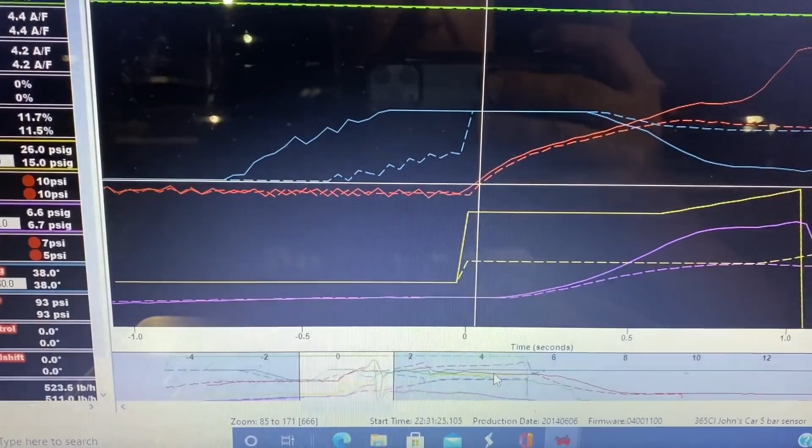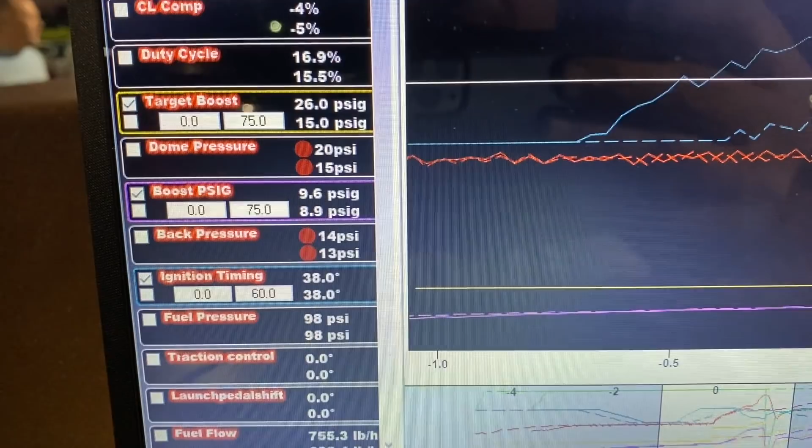You can see it got up on the wheel pretty hard and spun. So if you look at the data log, the first thing is I'm an idiot, and this has happened to me twice now. The solid line there is the run I just did. So look, it lets go of trans brake, and boom, I did have a little bit more on it there, but I did not have that much on it. It went to 26 pounds of boost. The top number is the actual boost as it's making it. It hooked it initially, but look at the boost curve here.

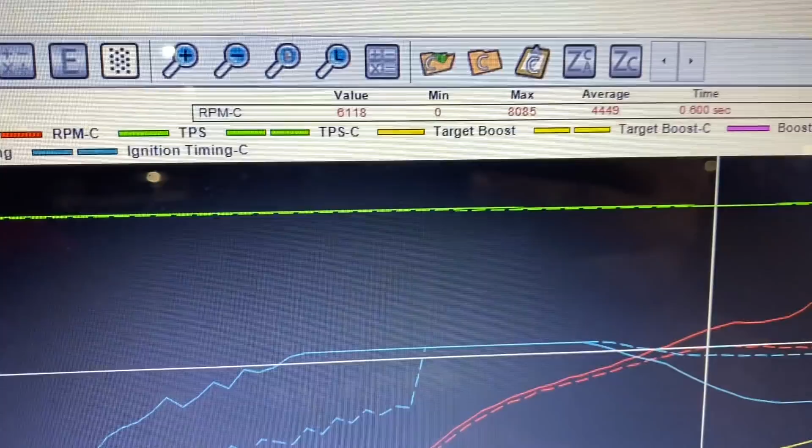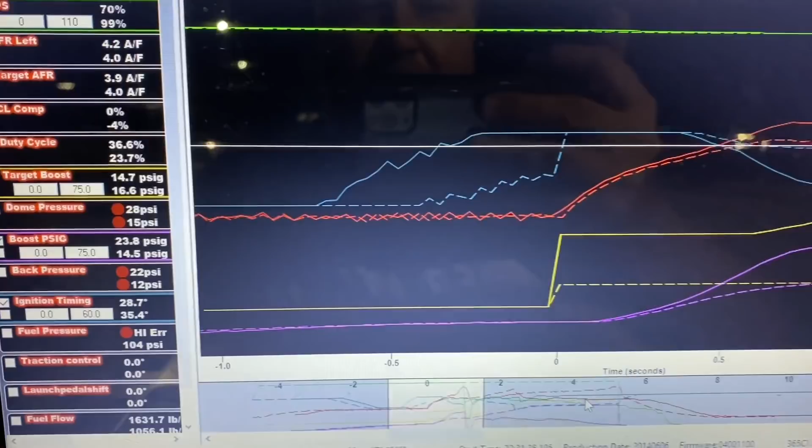So we're at 0.6 seconds into the run, that's at 19 pounds of boost, and you see it's just climbing. It made 25 pounds of boost before I let off. But also, if you look, I was like, well, that's not what was supposed to be. I bet if you go back and look in the video, look at that. I'm a freaking idiot.

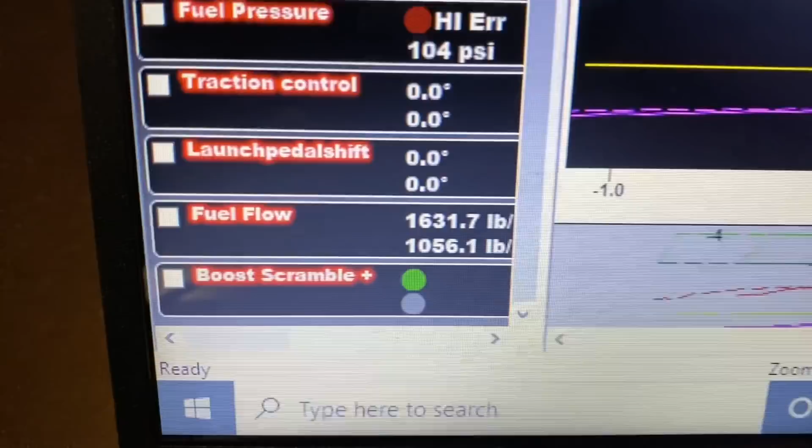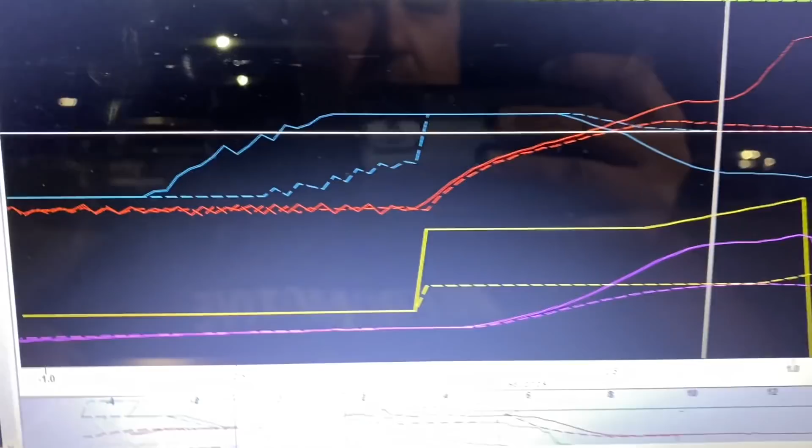It had 8 pounds on it on the scramble, and so when I let go of trans brake, it put 8 on top of what I was trying to make. So we're gonna have to go back up there again and try to make this pass again, because that's clearly not going to work. But that right there should be 8 pounds less dome pressure right there. So 8 pounds less, that should be about 16, 17 pounds of boost right there, and that's where I wanted it instead of 22. I don't know if it's going to take it or not, though, but we're going to try it. That's why it knocked tire off, because I'm an idiot and I had the scramble button pressed.

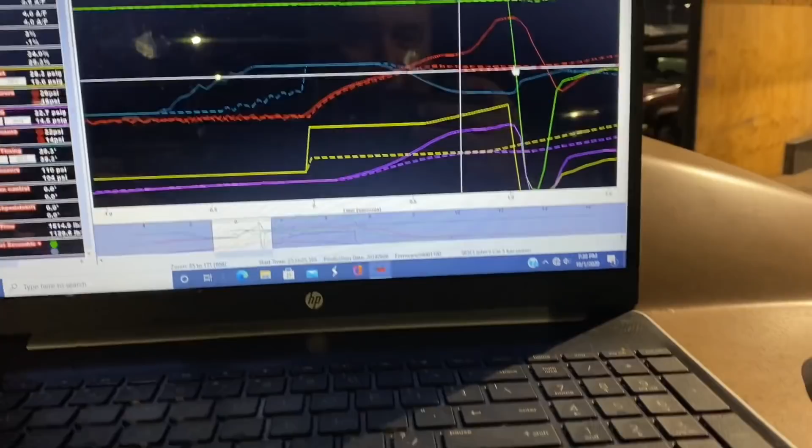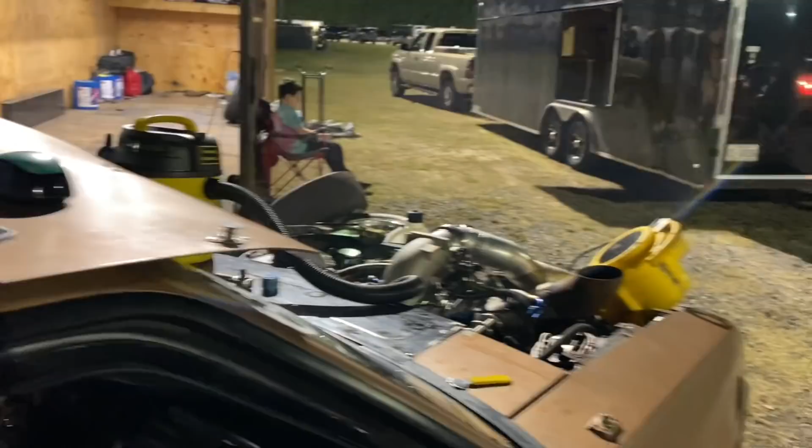Probably what I need to do is hook that scramble button up to a light somehow, so that when it's pressed on, a light comes on, you know what I mean, and that way I've got some type of notice. Or just don't be a fool and pull it back every time, make sure it's off.

Out here at Galot. David, he's got this - this is the car we shared a little bit of when I run last week. He's got the big block with a 118, and Cleve is here with his as well. He's been jumping on our live feeds with us.

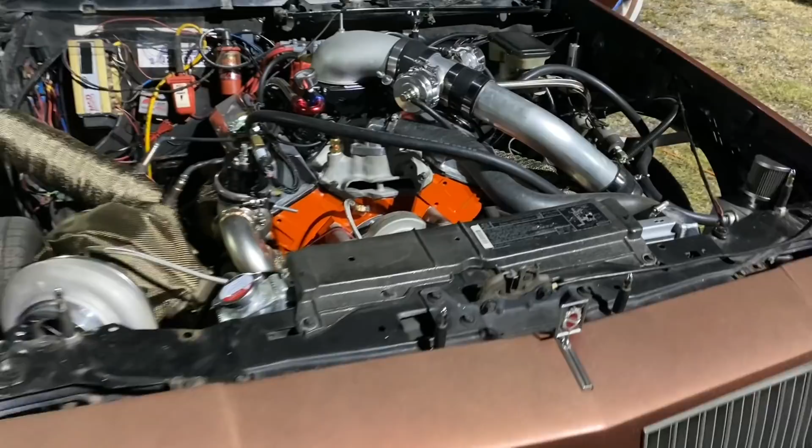So this is an LS motor with a single turbo on it - oh no, it's not LS, I have been deceived, I forgot. Look, I'm old school like you - Gen 1 small block Chevrolet, and it's on Sniper, right? Sniper X Flow. So he's just working the bugs out of this one. I'm gonna pull up his computer real fast and take a look at it. We just looked at David's and got his working. We're gonna turn his up just a little bit. He's on E85. What fuel are you on, Cleve? What fuel are you on?

Okay, so this is normal gas over here on this one. So that one was a little lean. It was lean popping, cutting off on the trans brake if you just let it sit too long. Cleve has yet to make a full pass or an attempt. So we're fixing to try this one out right now.

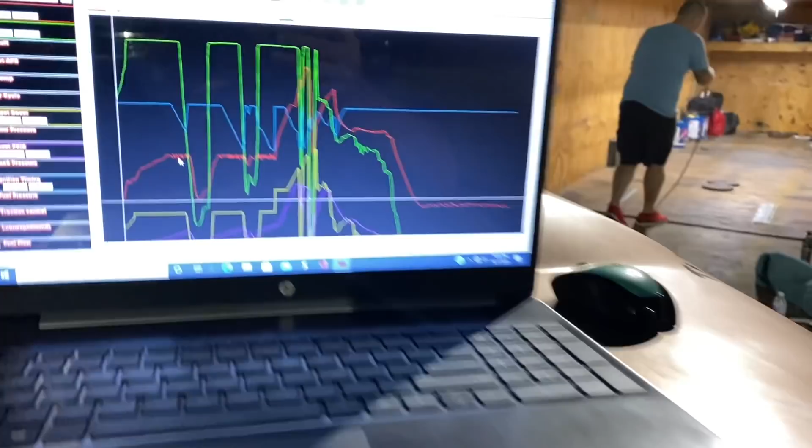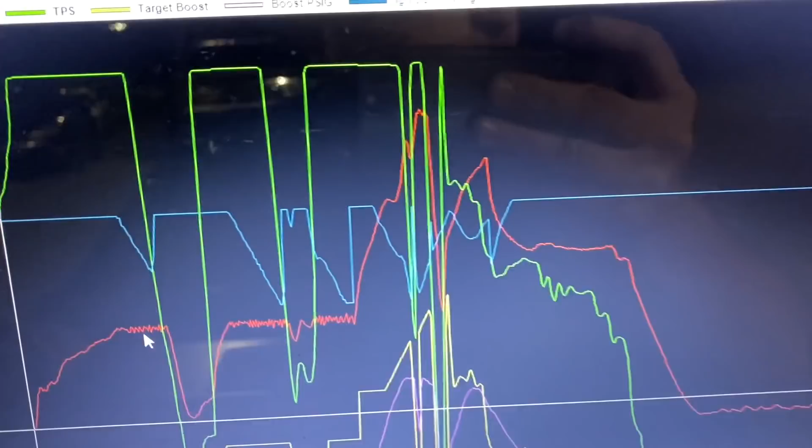Pass number 2. All this right here is just where I was in the lane, where there was a sportsman tree, and it was taking a little longer than I anticipated, but it got up there and hit the tire and spun again. So we're going to go back to what we know. The 497 pass is just a little bit hotter. I was trying something completely different, so it just didn't work out.

Cleve made a pass. Did he say he made a good pass? What did it do, did he say? Hold on the trans brake. Okay, so he might be having some mechanical issues. All right, we're going to roll up there and try it again.

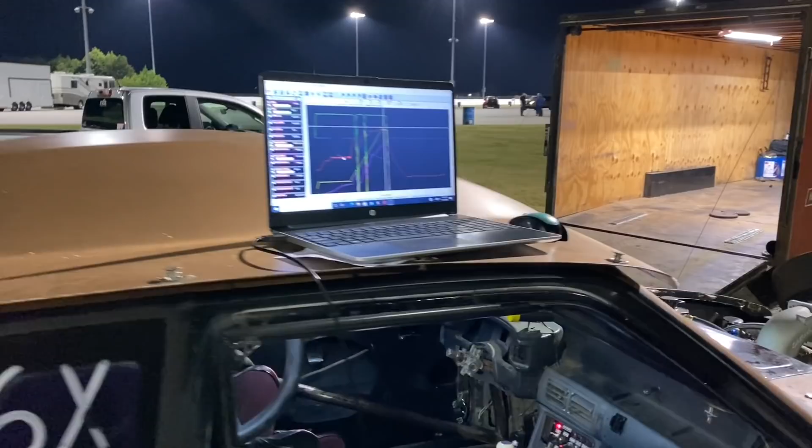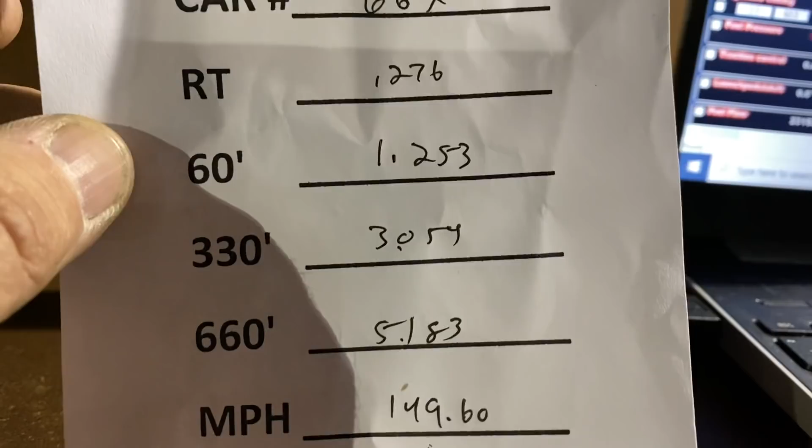Here's the data log. Something was happening with the actual timing printer, and so I don't think this is accurate. 125 could be accurate with the wheelie. That 305 is inaccurate most likely. Most of the time it goes like 328, 330, 331, 518, 149.

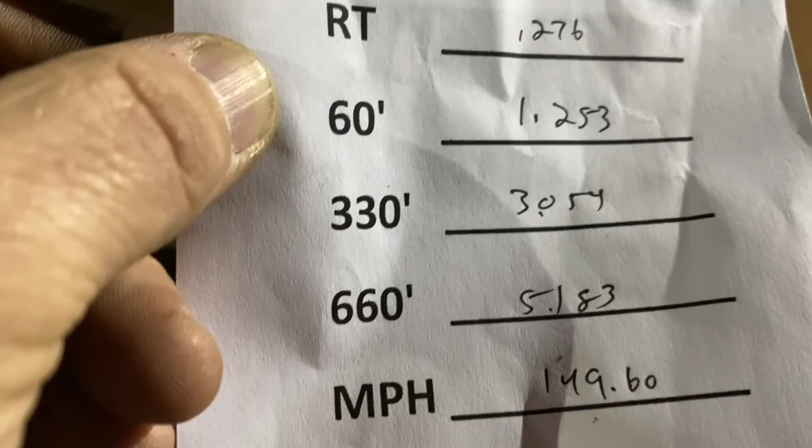That was accurate. That 0, maybe that was supposed to be a 6. 305, that's probably not accurate. Definitely ain't a 15, 20, 30. Yeah, that's not accurate. I don't know what number that's supposed to be, but it's not supposed to be a 0. But I should have had the Dragy on.

That's what we were just saying. So, you know, I pedaled it. It was coming up. It was trying to do a monster wheel stand. It was still, that was a little aggressive.

Now the temperature is a lot cooler in here, or out here. And today this was the busiest I have seen Galot Motorsports Park in a very long time. It was packed. But we had a blast out here. This was fun. I ran into Junior Bissett.

He looked at my door strap and he told me good job. So that's always awesome. This was a fail. The ending was nice, yeah, but this was a fail. My goal was to come down here today and get a 480 tune-up, and I failed. I did not get a 480 or 485 or nothing. So yeah, this is a fail.

What? You're going home with your car in one piece. Car is in one piece. So we're ready. We're ready for Kinston.

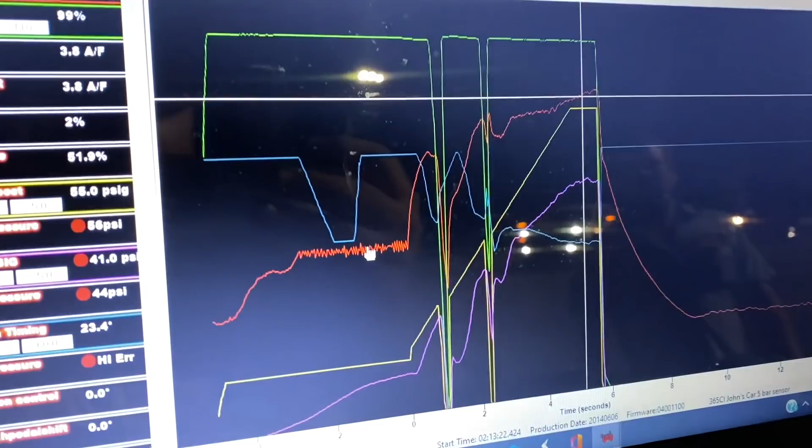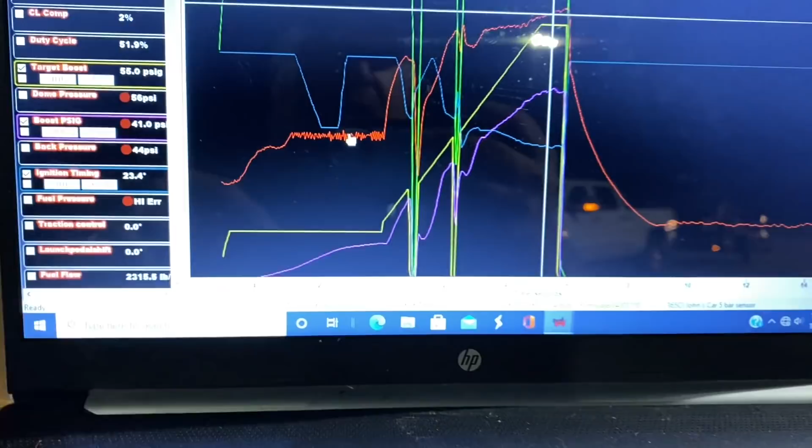So I'm gonna go home tonight and modify this tune-up a little bit. I'm gonna compare it and see how quickly. I did leave a little bit harder, and when I left a little bit harder, you see how it gets on the boost ramp a little bit faster. So maybe the solution is to put the 497 tune-up back in it and just leave a little bit harder, at 4,200 RPM, and that way the boost is elevated higher, so it's gonna follow the ramp faster. I know it's gonna do that, so maybe that's gonna be our solution off the trailer Saturday at Kinston.

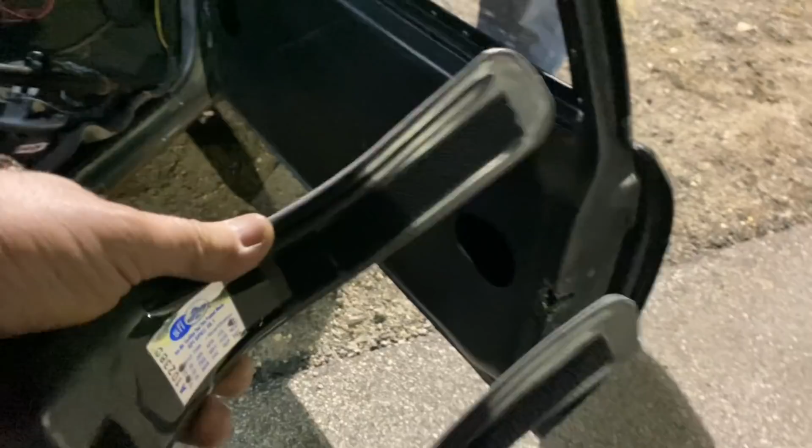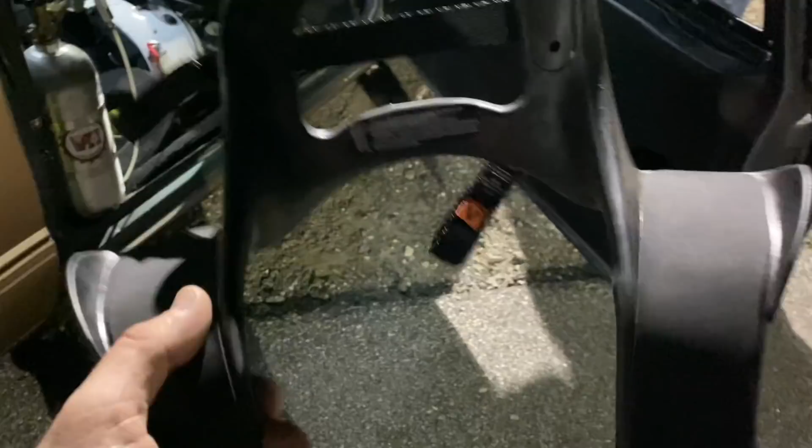Oh, something else I did with the Hans device today. I took the little Velcro things off, the little pads, and this thing is much more comfortable. I can move my head a lot better. It is a lot more comfortable. So just FYI for the winter. All right, guys, later.